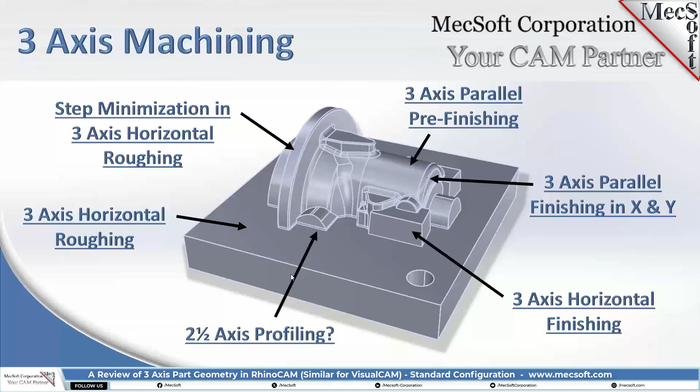We'll be looking at horizontal finishing for the walls that are nearly vertical, and we're going to be looking at 2.5-axis profiling as it compares to 3-axis, and what we're going to be doing in 3-axis. So we're going to show the difference of the two and why one is obviously better than the other. So let's go ahead on to the demo portion, and let's bring up our part here.

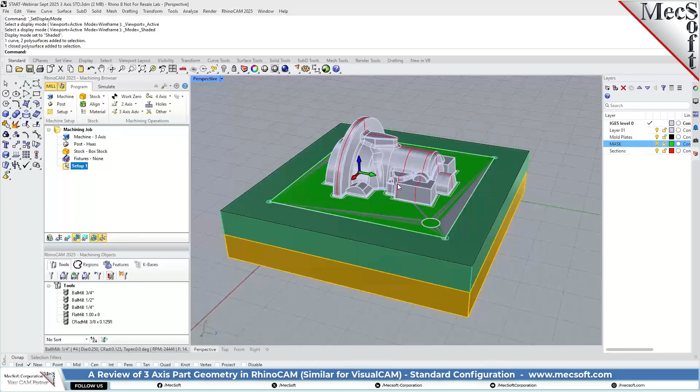Okay, so what I've got on the screen here, we've got the orthographic views: top, front, right, and perspective. I'm going to go into the perspective view. And just to look at what I've got over here on the layers, we've got mold plates. These are the 2 mold plates right here. This is our insert with our core. And we've got one surface for a masking surface that's going to mask out these holes so we don't machine them. And we have some section views that we have cut just to get an idea of the shape of this part in different areas.

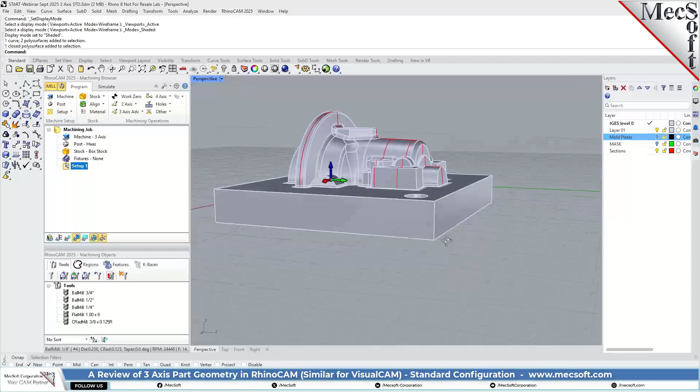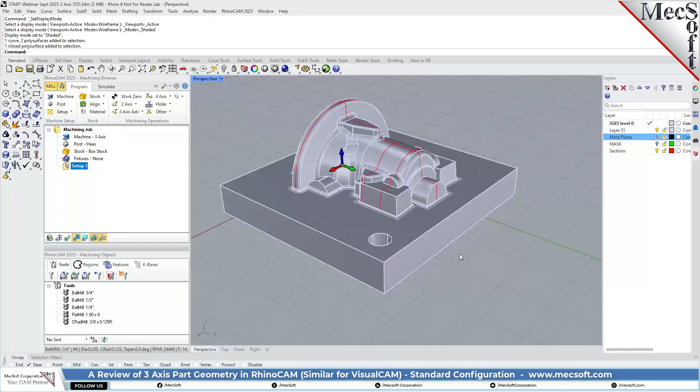Okay, so I'm going to go ahead and turn off the mold plates. So basically, the way mold inserts work, you have two diagonal pins for alignment of the plate, and then you have screws to actually fasten the insert to the mold plates itself. Okay, so what do we have? The first thing you need to do in any CAM project is get really familiar with the geometry that you're going to be programming, obviously.

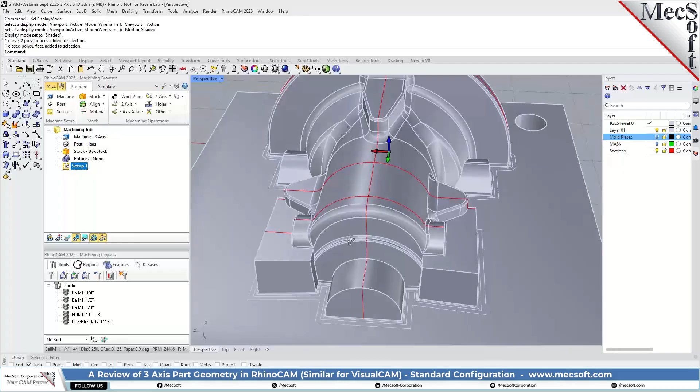So what is important with this particular set of geometry? Obviously, you have a lot of complex surfaces in here with some fillets. Nothing that we see here is really a problem with programming as far as the surfaces up here go. The primary area of concern, and you'll know this especially if you're a mold designer or a mold machinist, is this parting plane. So we have the core, which extends above the parting plane, and we're going to be paying attention to this transition area right here. And you're going to need to ask yourself, as you look at your geometry, where on this geometry am I allowed to have fillets?

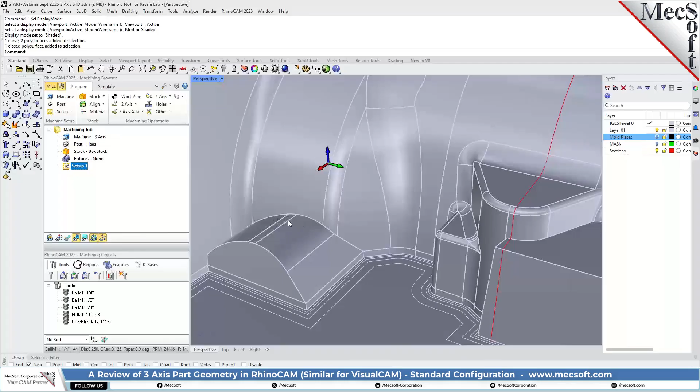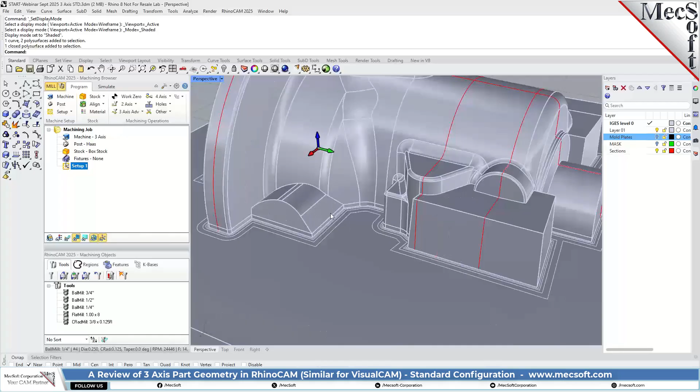In 3-axis machining, when you have contoured curves or contoured surfaces like this, it's difficult to get an exact sharp edge. So you need to find out what is acceptable as far as a fillet. How small of a ball mill can you use to get in there? What's acceptable to the mold design and your customer, etc. So we're not going to be worrying too much about these edges here. We're going to be just including them in the programming of the main body itself, but you do need to find out what is acceptable for the mold.

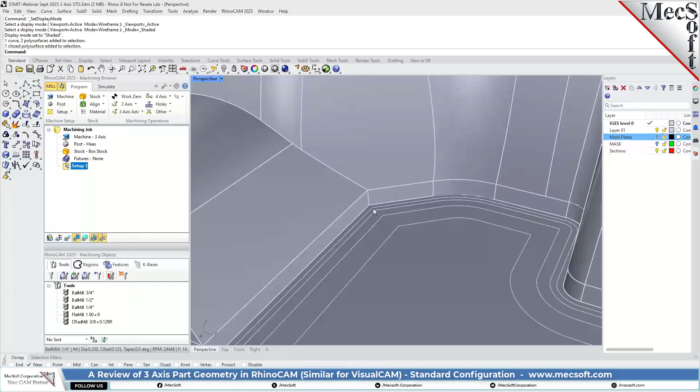Now remember, this is a prototype version, okay? So with this edge, you may have some leeway, and you may be allowed to put a small fillet in this edge, which in a prototype production just means this is the inner core. So this edge is going to be the inside edge of the cavity. So you may just have a little fillet in there, which may be acceptable as far as prototyping goes. But we're going to pay special attention to that as we program it out.

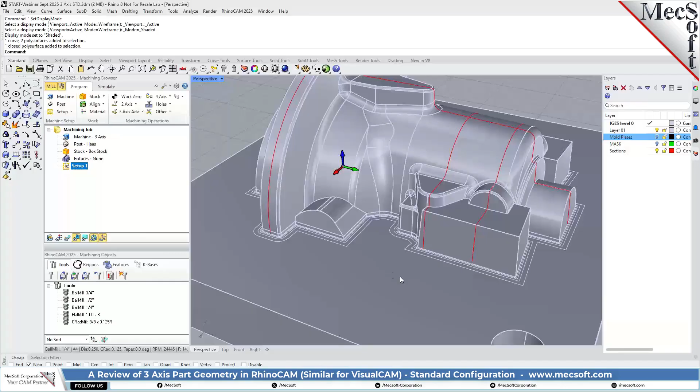Now, we do have a little bit more time than we usually do in the webinar, since we're using the standard configuration. We're going to be going through this relatively faster than we normally would in a professional configuration. So I'm going to go ahead and pop over and show you what this would most likely look like in a production scenario. So I'm going to bring over this right here. Now you see that we have the same core insert. We have the insert plate with the core surfaces on top. We have the mold plates here, and I'm just going to hide those.

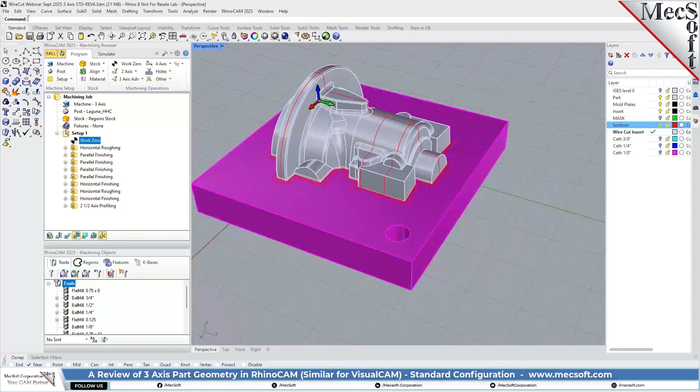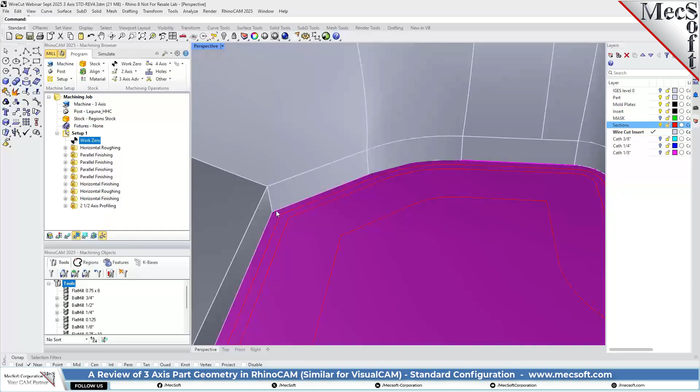Okay, so what will most likely happen for a production environment for this mold insert is that you really want to get a sharp edge there, because that's what the part requires at the parting plane or the parting line. So you really need to maintain that sharp edge. In order to do that in a production setting, you probably don't want to machine it the way we're going to machine it for the prototype.

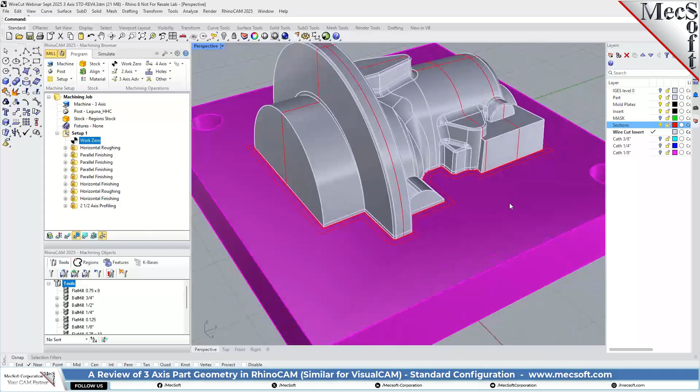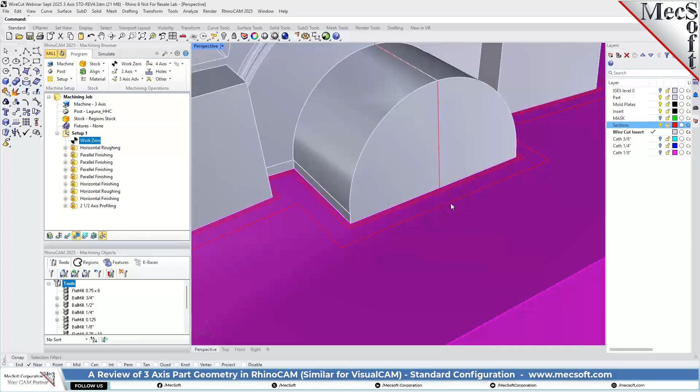So what they will probably do is wire cut that shape out. They'll mount this, the mold plate, or this is actually going to be a whole block, okay? And they'll probably drill a hole right here, since this is not a part surface, to feed the wire through, and then they'll wire cut it around. So let's take a look at what that looks like. I'm going to go ahead and hide this.

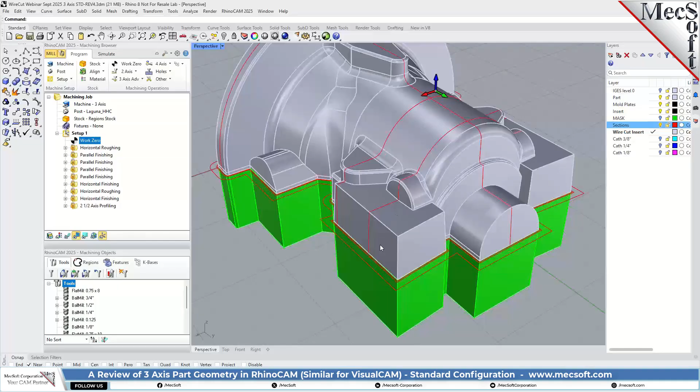Okay, so to get this sharp edge, I have it programmed out, but I'm not going to program it in this. I'm going to program it in the prototype. But they'll probably just machine on down as if this is a part surface, okay? And they'll just machine past this parting plane right here, which is no longer visible now. So the way I'm going to do it in the prototype, I've got a number of ball mills, starting with the 3/8, a 1/4 inch, and a 1/8 inch ball mill. So we'll be working it down.

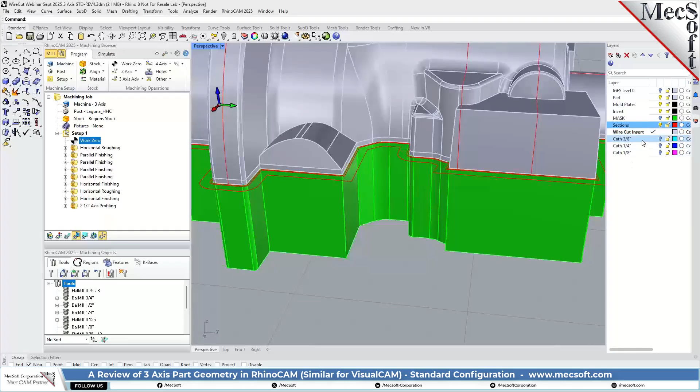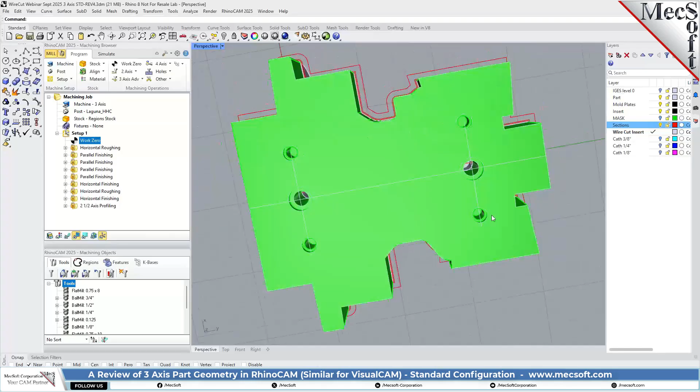So one question you may ask yourself, do I want to machine down to this? You can consider this a fixture, okay? Because that's the wire cut part of that mold plate, and your core is going to be mounted on that. So they've got a couple of pins here, which will align it with the core, and then you have some fasteners, cap screws that actually fasten it in place.

So if you're only machining one set, then you really want to pay attention to how you're going to machine at this parting plane. You can consider this a parting line, even though it's a parting plane, because you do have a line between the fixture portion and the core portion. So you may not want to have the tool actually run down on this fixture. You may want to maintain the tangent of the ball mill to stop at the actual parting line.

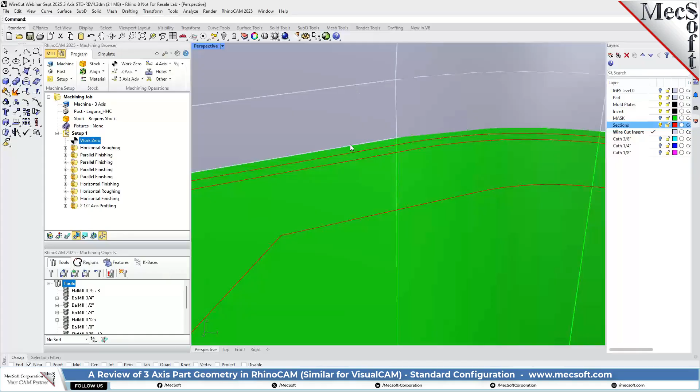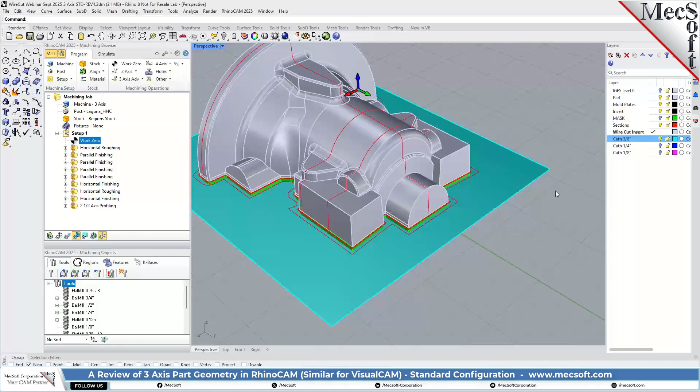Okay, so an easy way to do that is to use catch planes. You may have seen us do this, or you may have done this for a number of purposes. In 3-axis machining, every surface that's visible is taken into account when the tool paths are calculated. So if you have a surface here that's visible, the tool obviously is going to stop on that surface. It's not going to cut below it. As you can see here, we got some offset curves we're going to use for different tool sizes.

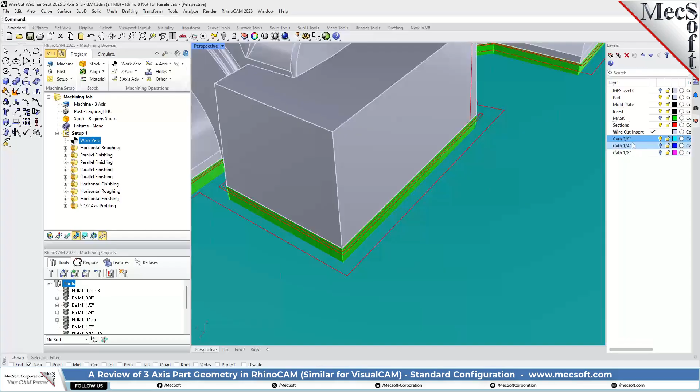So this catch plane, catch 3/8, means the ball mill is going to stop on this plane, which is 3/8 of an inch below the parting plane. So it's a 3/4 inch ball mill, and the tangent of that ball mill with this catch plane is going to hold that tangent right on the parting plane. Okay, so you got different planes for different ball mill sizes.

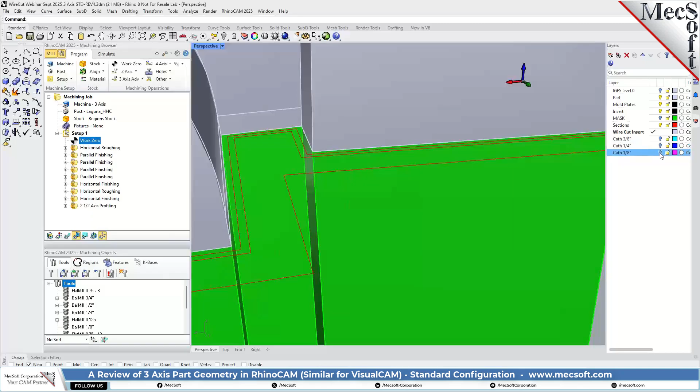So we got a 1/4 inch. Okay, so this is a 1/4 inch below the parting plane. This is going to be using a 1/2 inch ball mill, and then we have another one for a 1/4 inch ball mill. So they're in just different levels, which keeps the ball mills tangent to the parting plane.

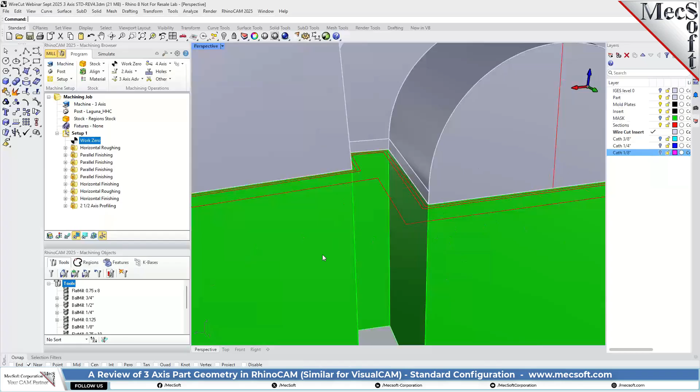Now, if you're wire cutting out more than one, which is actually what will happen, you can just ignore this method and just machine down, say, a 1/2 inch below this, like in a horizontal finishing operation, to match this profile, and it'll give you a nice sharp edge right there. Okay, I just wanted to go into that so you'd understand the different ways you might want to approach this particular insert. So I'm going to go back over to my start part here.